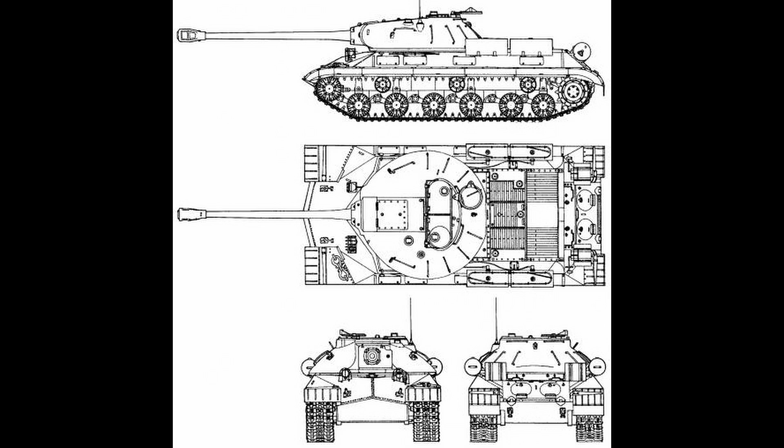Now I'm going to talk about the technical properties of the IS-3, and why Western leaders feared this tank so much. To start, the Soviet Beast weighed just over 46 tons. It was 9.85 meters long, 3.15 meters wide, and 2.45 meters high. It was crewed by 4 tankers: a commander, gunner, loader and driver.

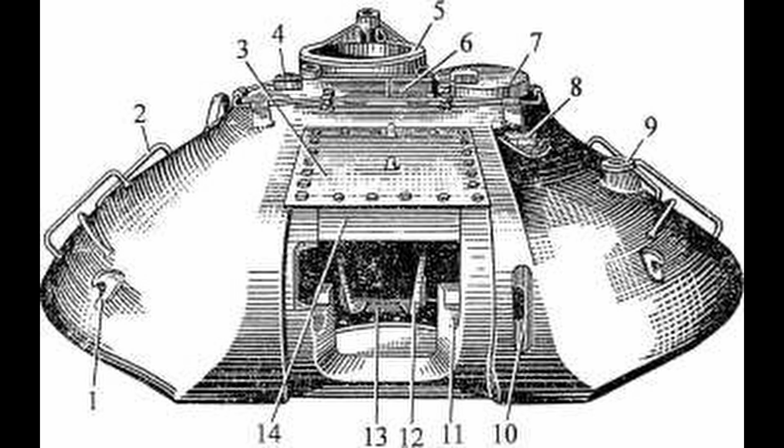The IS-3's armor was really effective, because its thickness was combined with a slope, which led to a huge effective armor thickness. The turret was a real fortress, with 250 millimeters of cast and rolled steel at the front, and its slope multiplied the thickness to a massive 400 millimeters of effective armor. Sides of the turret had thickness from 75 to 220 millimeters depending on the place, and the rear of the turret from 70 up to 120 millimeters. Hull front was 110 millimeters thick, sides were around 90 millimeters, whereas rear hull was 60 millimeters.

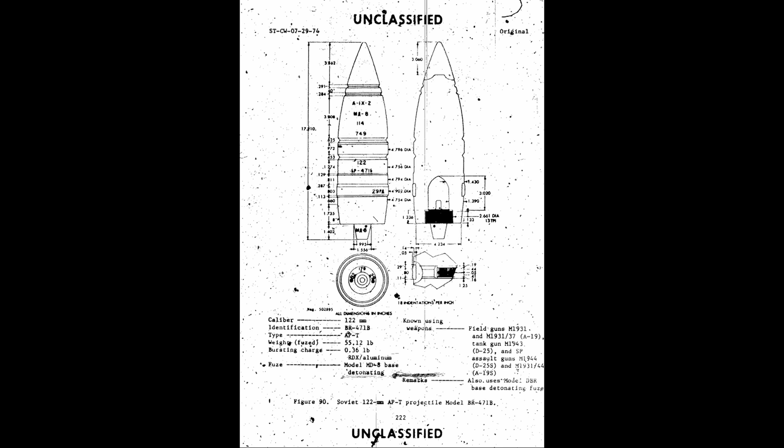And now, there it comes, the firepower. The IS-3 main gun was a 122 millimeter, enormously powerful cannon. Shells fired from such a cannon were able to penetrate a Panther tank's front armor from 2.5 kilometers away.

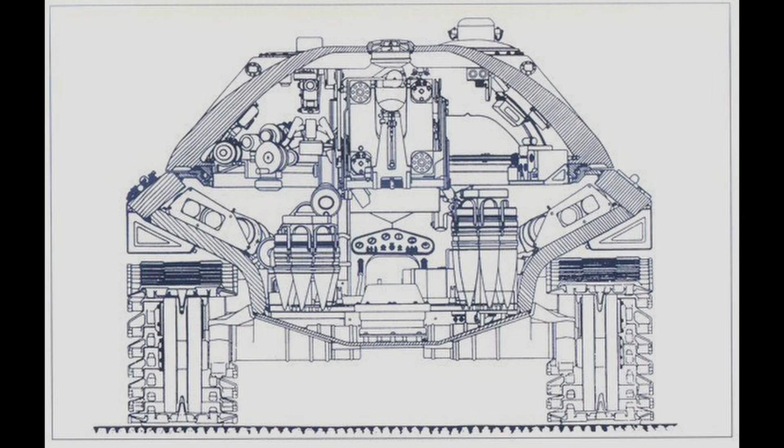However, the gun caliber was so big that the crew could only carry 28 rounds in the tank. Usually tankers carried 20 high explosive and 8 armor-piercing rounds. One downside of the turret and cannon combo was little gun depression, only 3 degrees, so even holding the high ground could not be very effective with this tank.

The main gun was supported by a 12.7 millimeter heavy machine gun on a pintle on the turret roof, and a 7.62 millimeter coaxial machine gun. The crew had 50 rounds ready to fire from the 12.7 millimeter and 63 rounds ready to fire from the 7.62 millimeter gun.

Non-modified IS-3s didn't have a radio station nor noctovision. These features were added in further modifications, which I will cover in another part of the video.

Now let's take a look at the tank's mobility, which was provided by the V2IS diesel engine, which gave the tank crew 520 horsepower and 2200 RPM. IS-3 top speed was 40 km/h on the road and 16 km/h off-road. Its fuel capacity, including external and internal tanks, was 785 liters, which provided approximately 300 km range on road and 150 km off-road.

Now I want to talk about IS-3 modifications, because despite the fact that the Allies were afraid of the new tank, the IS-3 was plagued by various problems. First, tanks were too heavy, and in order to fix this, the lower hull was slimmed down, which brought other problems. IS-3 stability was interrupted, which led to excessive vibrations and consequently to cracking of the gearbox mountings.

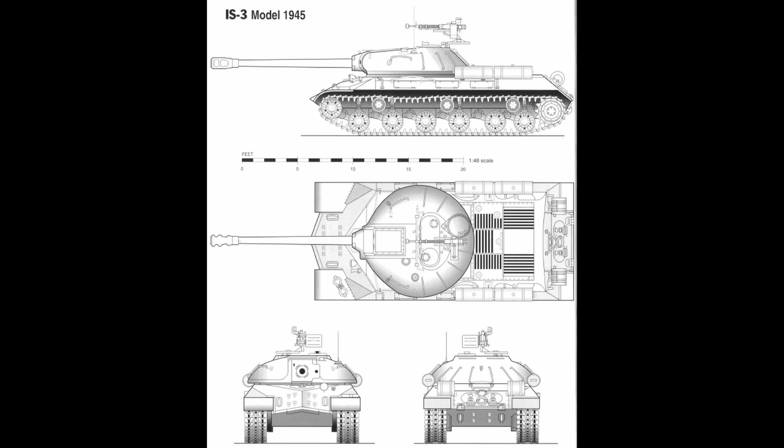And that was the IS-3 story that I wanted to tell you today.